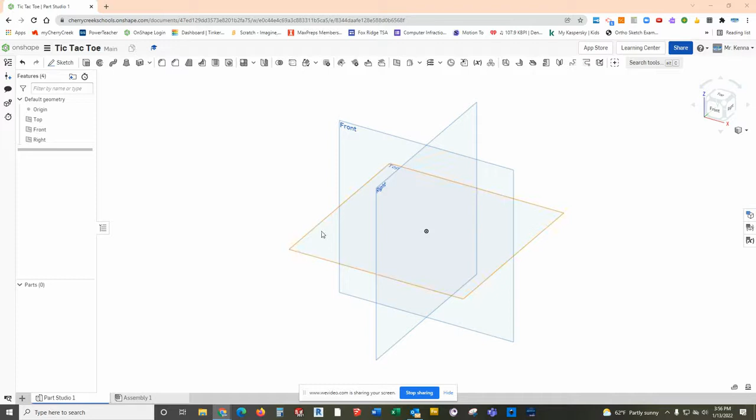So the first thing we're going to do is click on the top plane, look directly down at the top, zoom out some because we're going to draw a fairly big shape, and start with our sketch. I'm going to pick my center point rectangle, put my center on the origin, and pull out a very large square. To make sure it knows it's a square, I'm going to click all four sides individually, and I'm going to tell them to be equal.

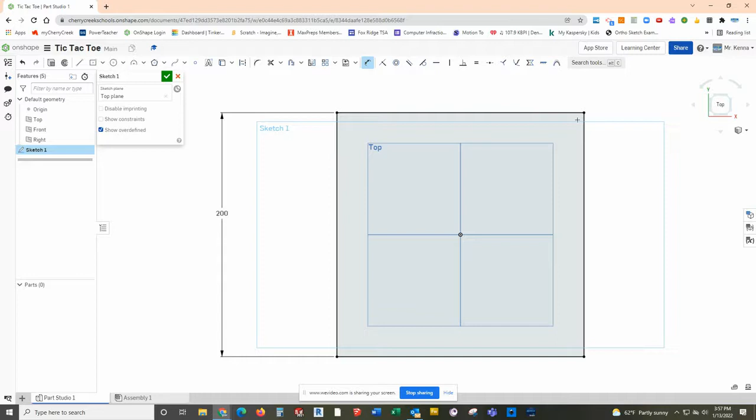Now I'm going to get my dimension tool, grab one side, and make it 200 millimeters, fully defined square. Now I could extrude this and then fillet the corners afterwards as a three-dimensional fillet, but this time I'm going to show you sketch fillet. We're going to click all four corners. I've already practiced this, so my radius might come up different than yours, which is fine. And when I click off, I want to set this with a radius of 20.

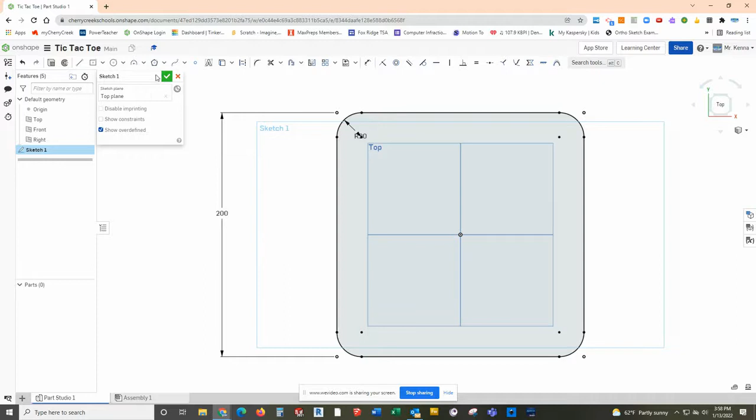Now, for whatever reason, it then knocks a bunch of my stuff as underdefined. So I'm going to get out of this fillet tool, click all four of the fillets and tell them to be equal as well. Oh, for whatever reason, it wants me to redo the lines. I guess when I fillet these, it loses its equal relationship, so I have to put it back in on the lines. And this is my base sketch.

I'm going to close it, go 3D, extrude, pick sketch 1. It's new, it's a solid, and 25 millimeters is actually perfectly what I want, and coming straight up is just fine. So I'm going to label this as the base. Perfect. I'm going to go back to the top view, click this surface, and start a sketch. Again, it's really important that I pick the top surface of my base.

After we had our piece cut out and our corners rounded, we would use a tool called a router, and we would cut 4 grooves in there to make the tic-tac-toe board, basically. So that's what I'm going to do now. I'm going to still use my center rectangle, and go from the center, the origin, straight out to the side. Sorry, I don't have my tool active. So from here, straight out to the side, click, and come somewhere up here.

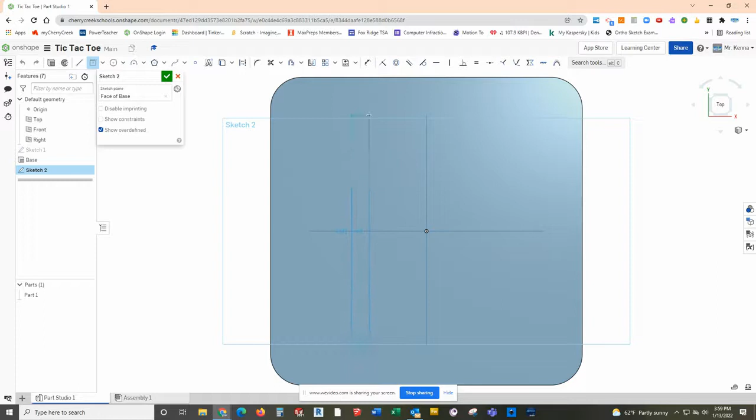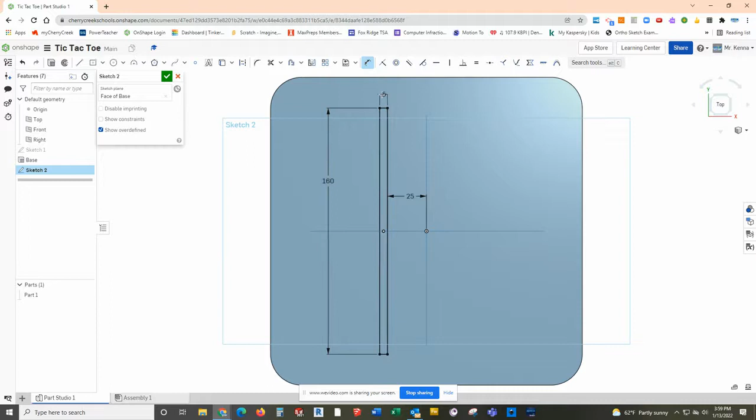Here are the dimensions I'm going to use. From the origin to the edge will be 25. The entire length will be 160. And the thickness of my groove is 5 millimeters. And I am going to accept it. I'm going to extrude, remove. The face that I want is sketch 2. The depth is 5 millimeters. And I am going to call this the V groove, as in my vertical groove.

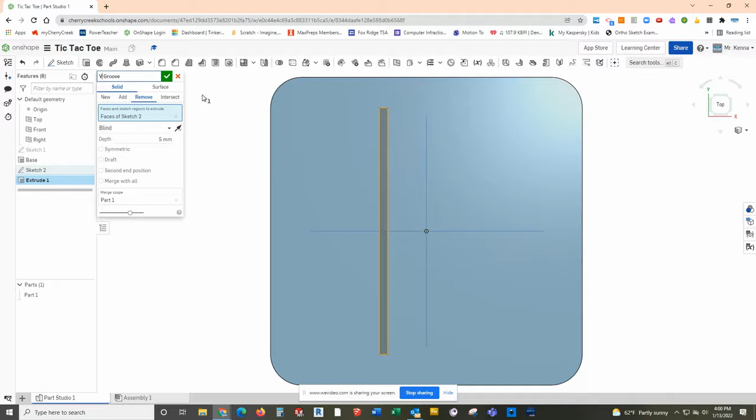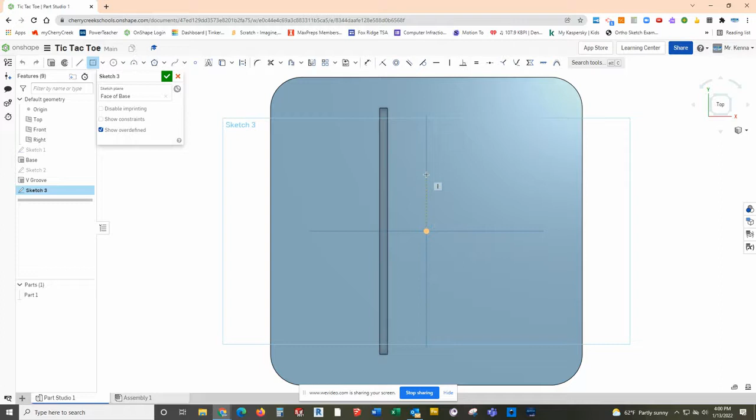Okay. And now what I'm going to do is I'm going to go ahead and draw the horizontal groove and then do all the mirroring. So I'm going to still click this surface. I'm going to start sketch, and I'm going to repeat the steps, but in the other direction. So I'm going to go from the origin with my center rectangle straight up, click out and draw my rectangle. The measurements are basically the same.

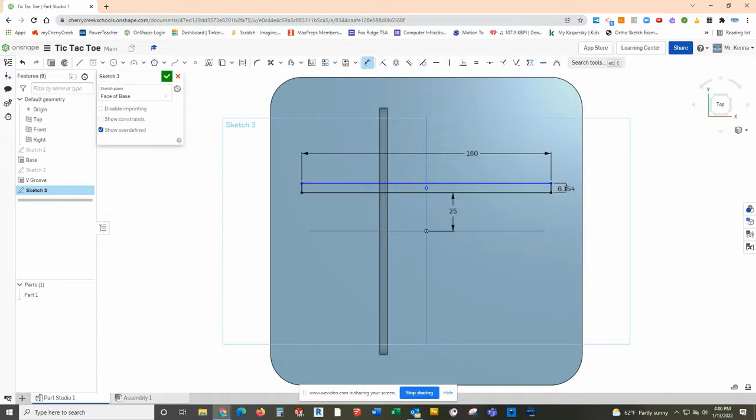So from the origin to the lower edge is 25. The whole length is 160. And the width of the groove is 5. Fully defined. Accept it. I am going to do extrude, remove. This time it's sketch 3. The depth is 5. And this is my H groove, or horizontal groove.

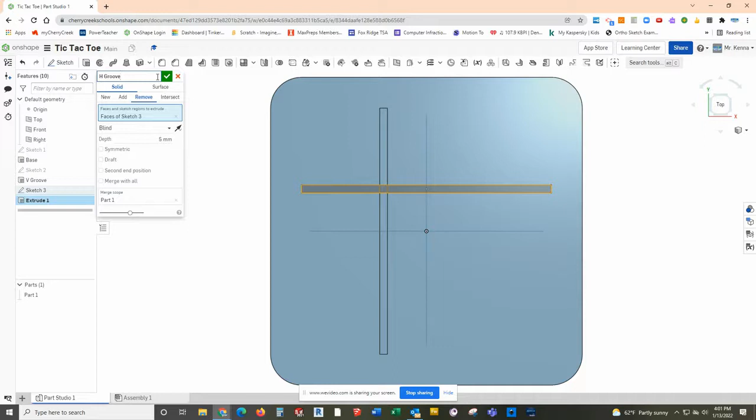Now what I'm going to do is go to my 3D view. Now what I'm going to use is I'm going to use the mirror tool. This is where I can mirror a whole feature, and I have to use a plane, okay, or a surface. In this case, I started everything from the origin, so I kept the front and the right plane in the center of my part, and I did that on purpose so that I could use those to mirror these grooves.

So when I click mirror, the first thing I have to do, which is kind of annoying, is it wants to mirror an entire part. And I don't know why. If we're using good design practices, we never do more than one part in a part studio. So to me, I think the default should be a feature mirror, but unfortunately we always have to change it. So we change it to feature mirror.

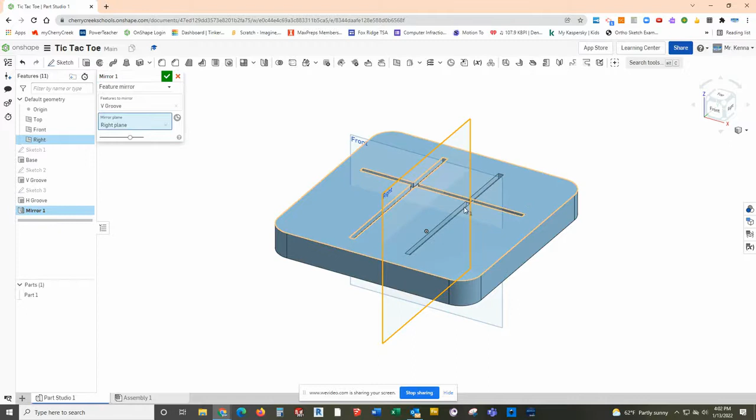Now the feature I want to mirror is my vertical groove. So I'm going to click V groove. The mirror plane, because my vertical groove goes this way, that I'm going to want to use is the right plane. And I should basically see a preview of it over there. And I'm going to accept it.

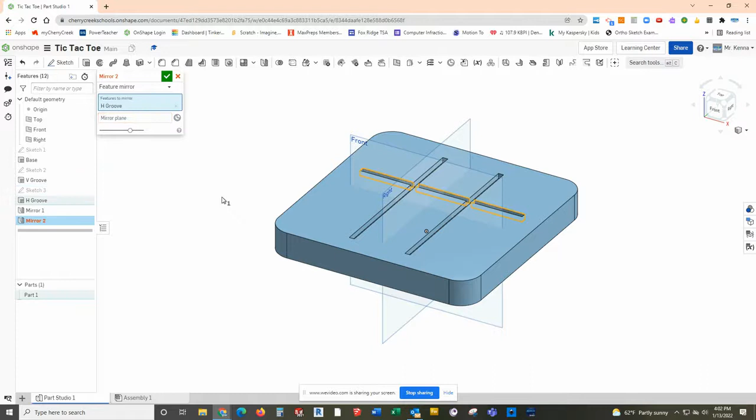Next, I'm going to take my H groove and click mirror and change it to a feature mirror. And I have to pick my H groove again. Oh, I'm sorry, I picked mirror 1, H groove. And my mirror plane is the front plane.

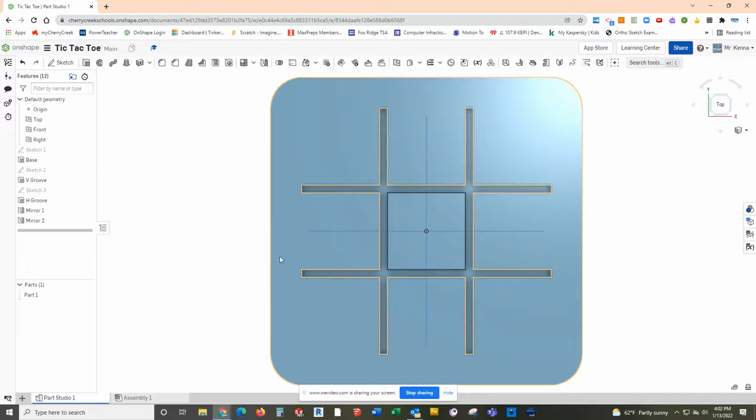So now, once I do both of those mirrors and I look at the top, I have this perfectly drawn tic-tac-toe board where I basically have 50 millimeter squares in all of these, and then about a 20 millimeter border all the way around. This is the first startup of my tic-tac-toe board. Okay, I should have probably named these mirrors. So if you'd like to label them V mirror and H mirror, that probably would make sense. I'm going to just leave them as 1 and 2 so that we can move on and hopefully keep this tutorial short.

The next thing I'm going to do is I'm going to create the hole. So like I said, it would use a peg, kind of like a golf tee. So I would have like 6 blue golf tees and 6 red golf tees, and you could play against somebody. Obviously, that's more than you need. But you could play against somebody putting your tees in, and that marked your spot, trying to create 3 in a row. So we needed a hole to put those golf tees in, and we drill those holes about 20 millimeters deep.

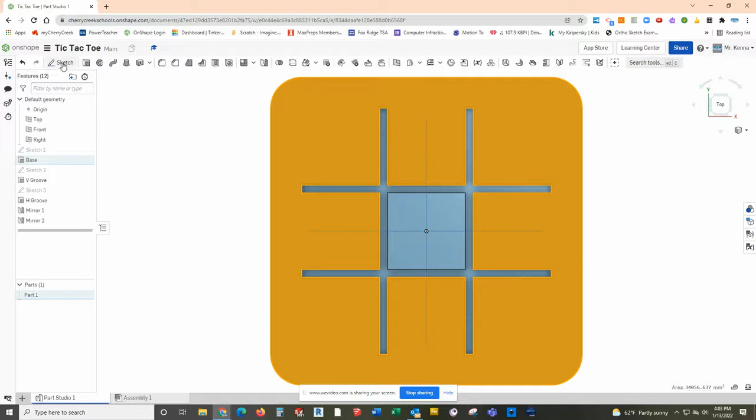So I'm going to again look at the top view, and looking kind of in this top corner one, I'm going to go ahead and draw this one first, because that's how it makes it real easy to use the tool I'm going to show you. So I'm going to click sketch. I'm going to grab a circle. I'm going to center the circle in my 50 by 50 square by going from the center to this edge at 25, center to this edge also at 25, and then we're going to make a 10 millimeter hole, fully defined.

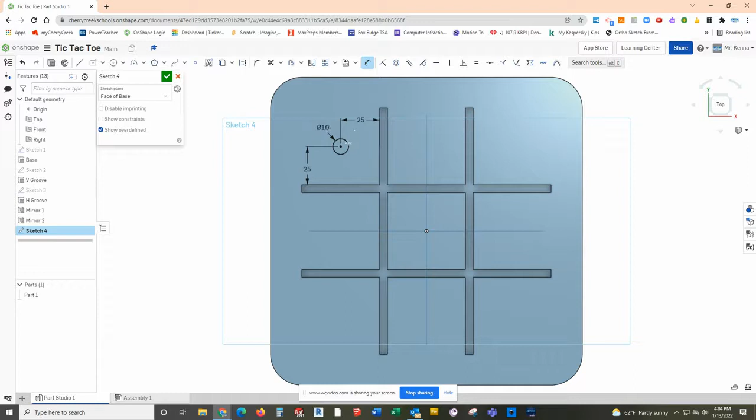I'm going to use that. I'm going to extrude, remove, 20 millimeters deep. I'm going to go to 3D view and double check that it's going down 20 millimeters, which is exactly what I need it to do, and I'm going to accept it.

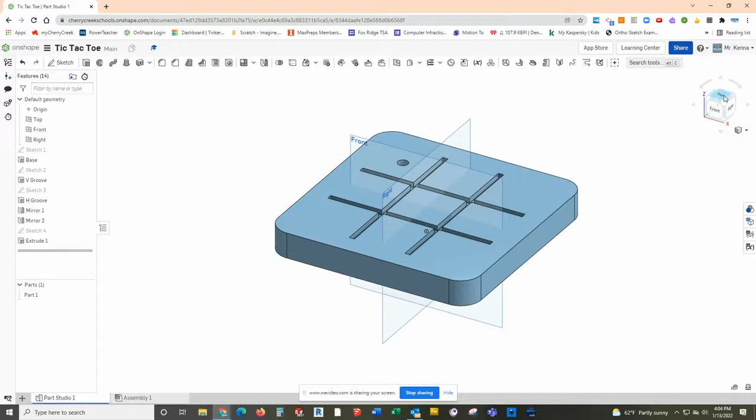Now I've done a lot of sketching and extruding and all that sort of stuff. I'm not going to do anymore, which you might think is kind of weird. It's like, Mr. Kenna, you got 8 holes to create. All right, I'm going to use a cool tool called linear pattern. So I'm going to go ahead and start the linear pattern tool. It's the one that looks like a little stack of blocks.

I have to change it from a part pattern to a feature pattern. The feature that I want is this extrude one, which I should have as a hole. Now the next thing it asks me for is a direction. What I need is a horizontal line. So I'm going to pick this edge right here. Works just fine. Any horizontal line would work. Depending on which way it starts to go, you may need to flip this direction. It goes red this way because it's kind of overlapping something.

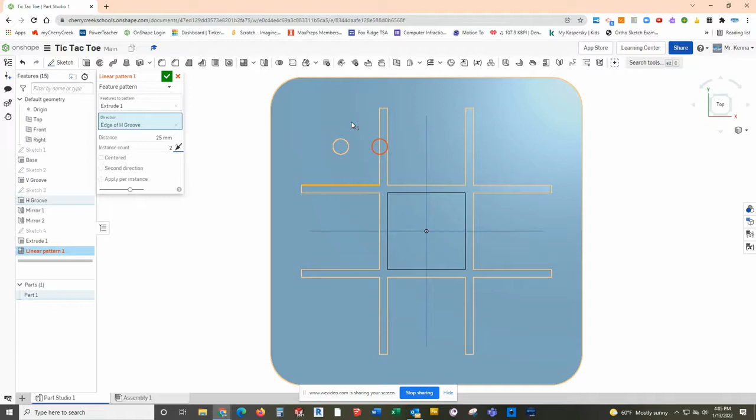But then what we have is the spacing distance. What I want is basically from the center of this one to the center of this one to be about 50 millimeters. Now, when I say that, I actually have to add something, because I also have to think about the width of the groove. So it's going to be 25 to get to the edge of the groove, as you can see here, 5 to get to the other side, and another 25 to get to the middle. Altogether, that is 55. So it is 55 millimeters. So I can run it center to center, and it's giving me a preview.

Now, the thing is, I don't want just 2 copies. I want 3 copies. And you can see that appears. Now, I know we're using this for something relatively simple where it's just 3 across and it'll end up being 3 down. But if you had to do something where you needed a series of 20 holes that were all the same size and equally spaced, I just put the number 20 in there and it would make them all. So this is a really good tool. It's a great time-saving tool.

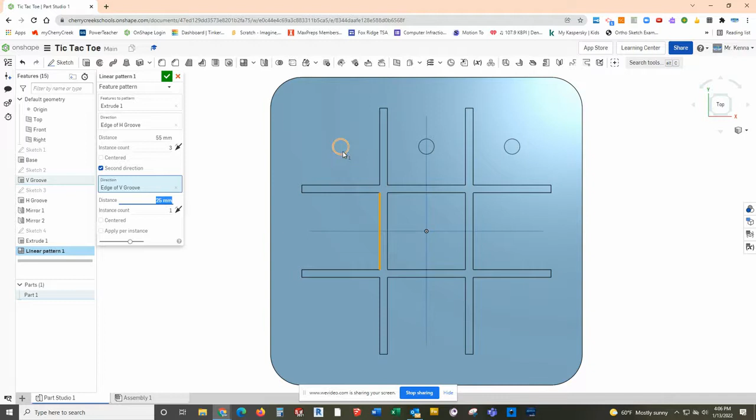Now, the pattern of going just in a straight line is nice, but I can also go in a second direction. So in my second direction, I'm going to pick a vertical line. I'm going to set the spacing again, because again, I have to go 25 to get to the edge, 5 to get across, and another 25, which gives me a total of 55 to get to the center of the next box. So 55 millimeters. I don't want 1 instance, or the number of times it occurs. I want 3. And that gives me all the holes.

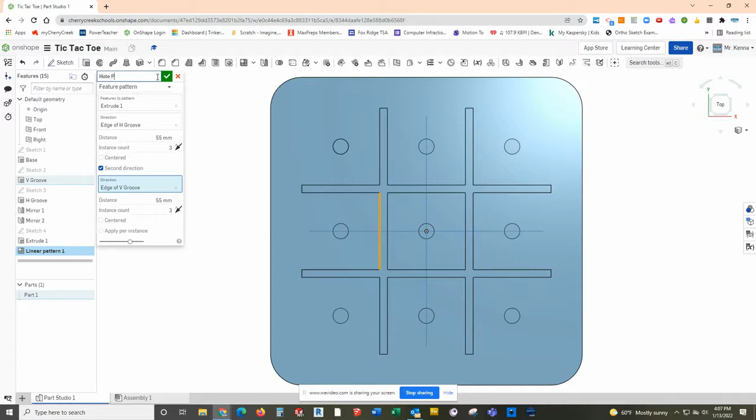Okay? So this, editing this, is the hole pattern. With extrude 1, since I didn't name that, being the hole. So now I've created my entire tic-tac-toe board. So like I said, you'd make this, use your little golf tees to play the game. Now, in order to finish the project, we also need to do some of the stuff that we've done for a while. We're going to rename the part tic-tac-toe board.

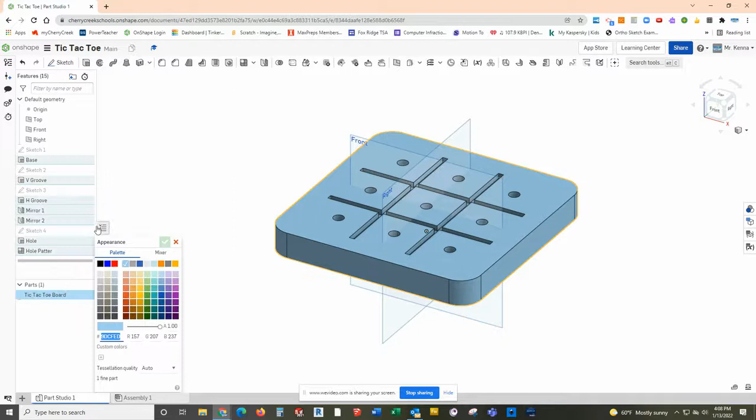And I am going to apply or assign the material. Oh, that's right. If you type in oak, you're going to find one that's called oak, red. That's the one we're going to want to use, is red oak. Don't use white oak. Make sure you use red oak. You can, if you want to, try to edit the appearance, but unfortunately, in some other softwares, there would actually be a wood type pattern. And this one, the best you can do is kind of like a tan or something like that, which, as we know, doesn't matter.

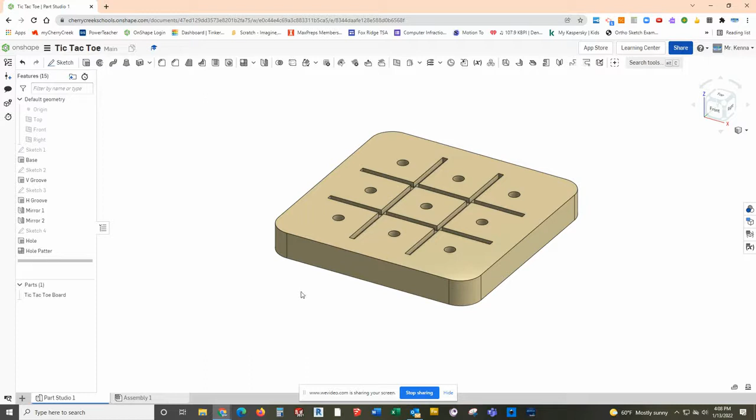I especially don't like the planes in my way kind of here, so I'm going to go ahead and hide the planes and the origin so that I don't see any of that. I'm going to kind of use my control key and move that over, select my board, select mass properties, so that this is showing that I know that you made everything the right size. So here's your screenshot to turn in this tutorial, which is your tic-tac-toe board.